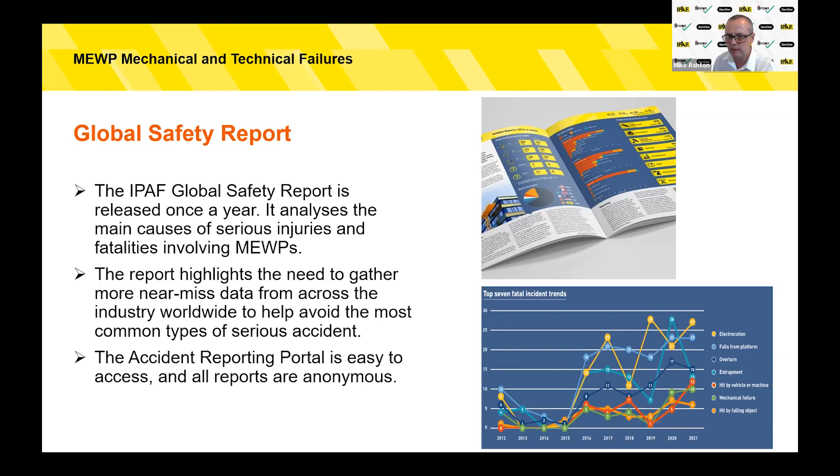In the 10-year reporting period, from January 1st, 2012 until December 31st, 2021, there have been 332 reports from 17 countries involving mechanical and technical failures on Mewps. There were 346 people involved and 39 fatalities. Construction accounted for 50.8% of reports, followed by rental activity and arboriculture.

The UK reported the most mechanical and technical failures overall, with nearly 75% of all reports originating from there. The US and the UAE were second and third place respectively. Accident reporting is mandated in the UK and the UAE. There have been 2 spikes in mechanical and technical failures in this period - the first one was in 2015 to 2016, and the second one was in 2019 to 2021.

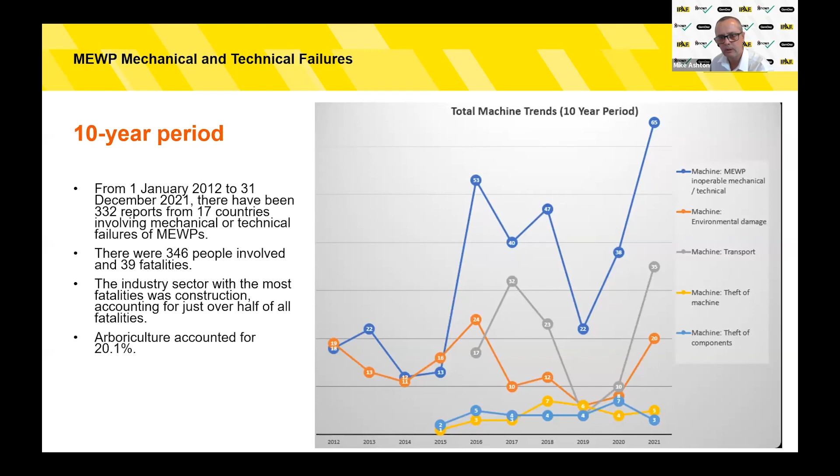This slide provides us with information on the period 2019 to 2021, so this is the 3-year reporting period. The number of fatalities in this period has risen significantly.

There were 23 fatalities, which is up 91.4%. Construction has nearly 60% of the reports, followed by rental activity and arboriculture. Nearly 60% of incidents occurred in the UK, followed by the US and the UAE.

The most common type of Mewp for incidents to occur on in this reporting period was 3B, mobile boom, with nearly 30%, followed by 3A, mobile vertical, with 26.2%, and then 1B, static boom vehicle type.

So 57% of incidents occurred in construction, nearly 20% occurred in rental activity, nearly 9% occurred in arboriculture, and 7.4% occurred in facilities management.

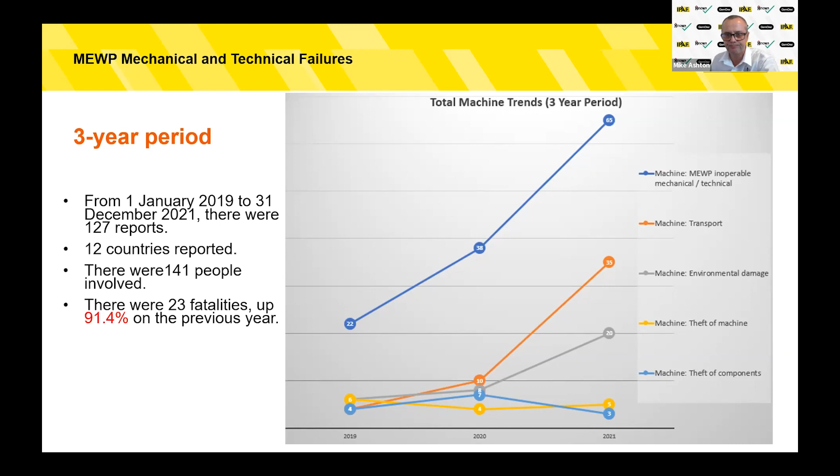This slide provides information on a 1-year reporting period, so this is 2021. The standout information here is that fatalities were down just over 30% on the previous year.

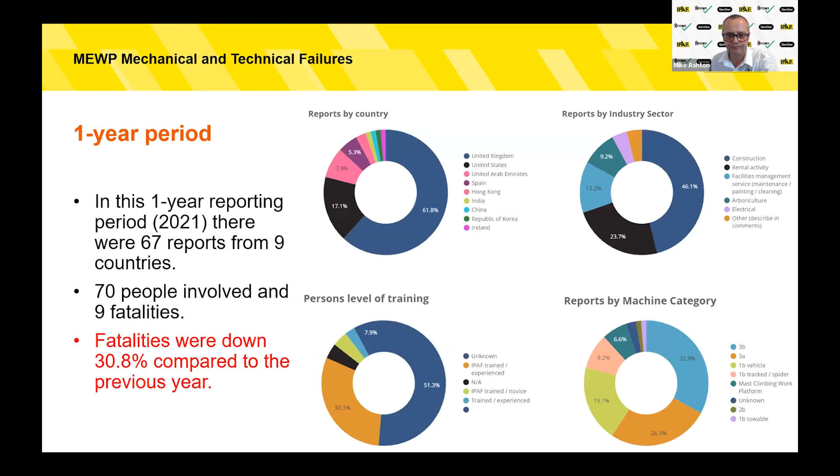This is our most up-to-date slide showing information from the 1st of January to November the 30th, 2022. So far, we've received 52 reports from 11 countries, 77 people involved, and 2 fatalities. So fatalities are down 77.8% compared to last year.

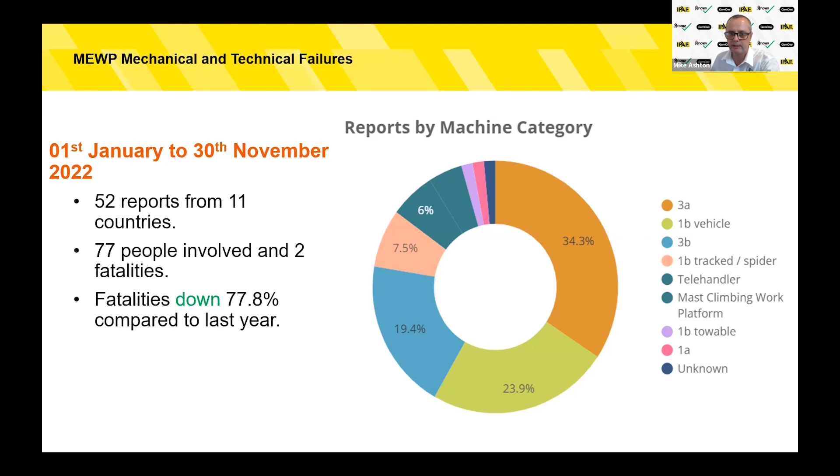Okay, so possible causes of mechanical and technical failures on Mewps. We need to prevent or minimize the likelihood of these failures occurring. So how can we do this? Next up, we'll be focusing on why and how failures occur, and we'll be covering the following items.

Number 1, failure to perform pre-use checks by Mewp operators. Number 2, failure to follow manufacturers' inspection and maintenance programs by owners of equipment. Number 3, complacency or behavioral-based violations. Number 4, impact or collision with other plant or objects. Number 5, unforeseeable failures. And finally, number 6, operating a MEWP outside of its capability.

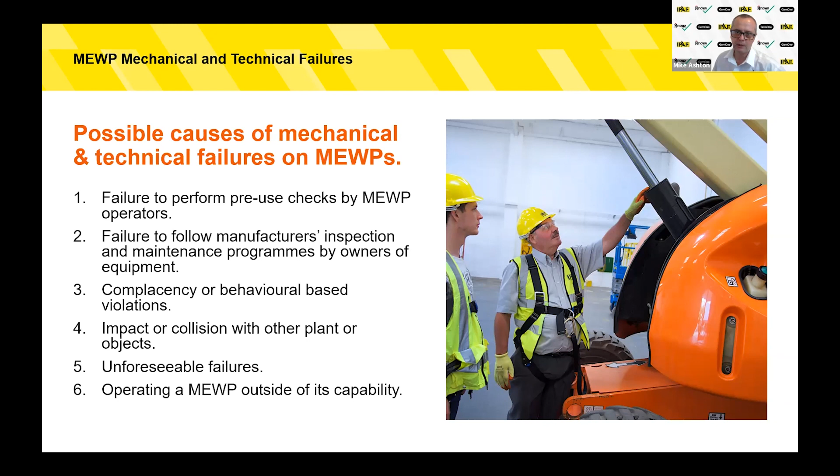First up is number 1, failure to perform pre-use checks by a Mewp operator. Pre-use checks must be carried out prior to use. The purpose of a pre-use inspection is to identify faults with operating systems, damage to equipment, and anything that could foreseeably go wrong. Pre-use checks must be recorded in the operator's logbook.

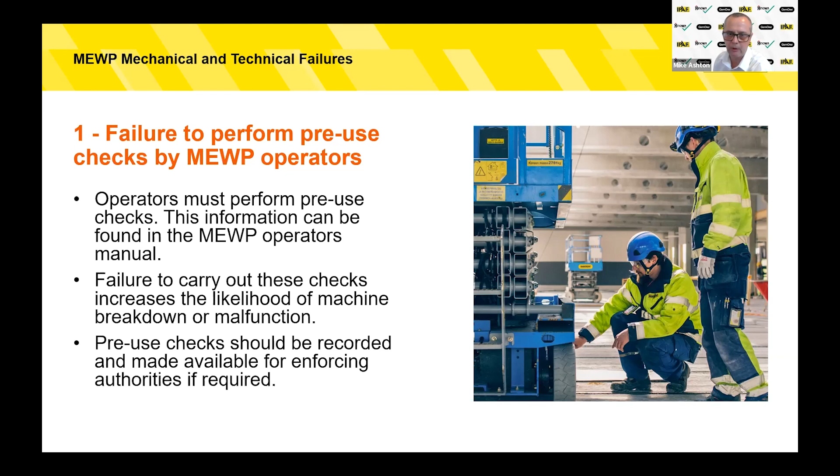If there are any faults identified on a pre-use inspection, the Mewp must not be used and the fault must be reported.

Number 2, failure to follow manufacturers' inspection and maintenance programs by owners of equipment. Mewp manufacturers specify the periodical inspection periods and maintenance programs. To ensure the safe use and reliability of your equipment, these instructions must be followed.

Examples of inspections could be 3-monthly, 6-monthly, or annual inspections by a competent person, as well as scheduled maintenance when a machine is at a certain age or has recorded a certain number of hours.

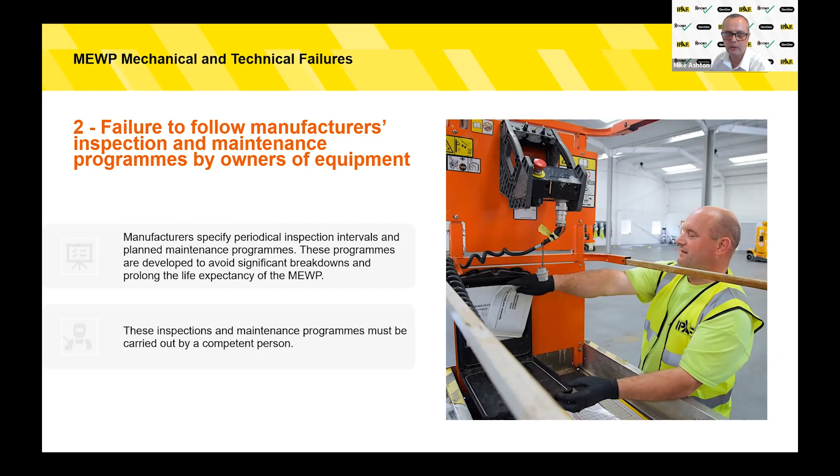Number 3, complacency or behavioral-based violations. Complacency is not laziness, it's an overconfidence that makes us unaware of potential dangers or threats, basically taking things for granted that nothing will go wrong.

This is not the attitude to have when it comes to the safe operation of MEWPs. Malfunctions do happen, damage can occur, and a damaged MEWP increases the likelihood of incidents occurring.

Violations are different to complacency. A violation is a deliberate deviation from rule or procedure. For example, if an operator failed on purpose to carry out their pre-use checks, that's a violation. We are seeing an increase in behavioral-based safety infractions from our reports received in the accident portal.

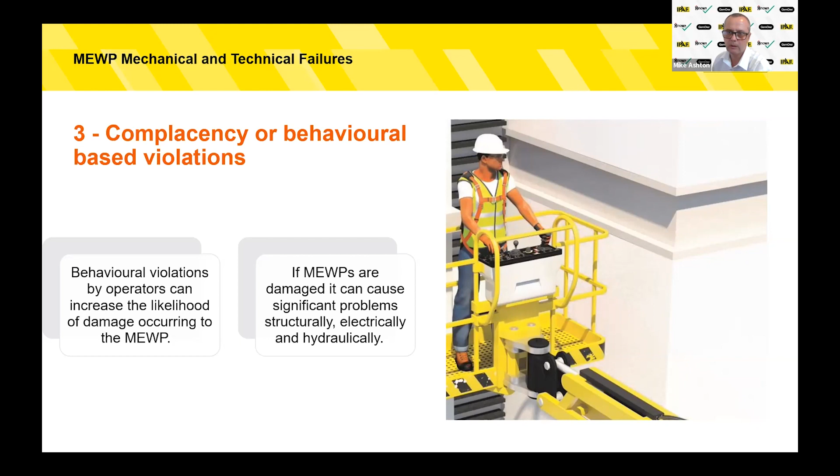Number 4, impact or collision with other plant or objects. If a MEWP has been impacted, it needs to be checked by a competent person for damage. Impacts can affect the safe operation of a MEWP, and can also affect hydraulics and electrical operating systems.

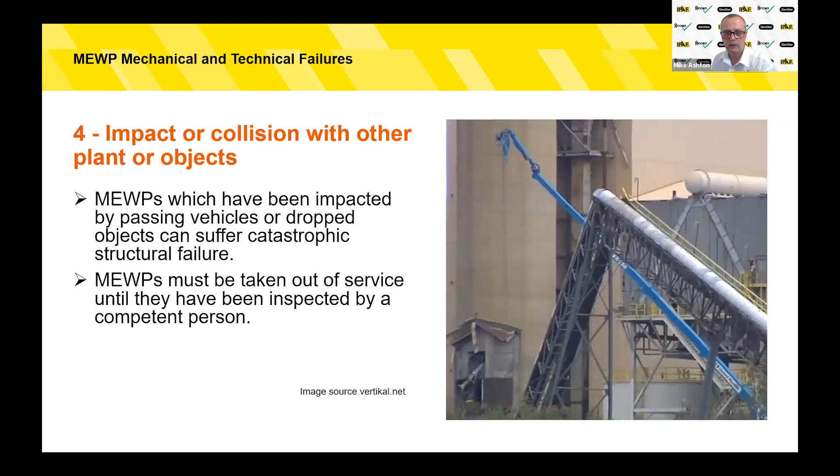Number 5, unforeseeable failures. Things can go wrong, we know this, but if we do all we can by carrying out inspections and checks, we can minimize the likelihood of mechanical and technical failures occurring. If things do go wrong, you should always isolate, tag, and report.

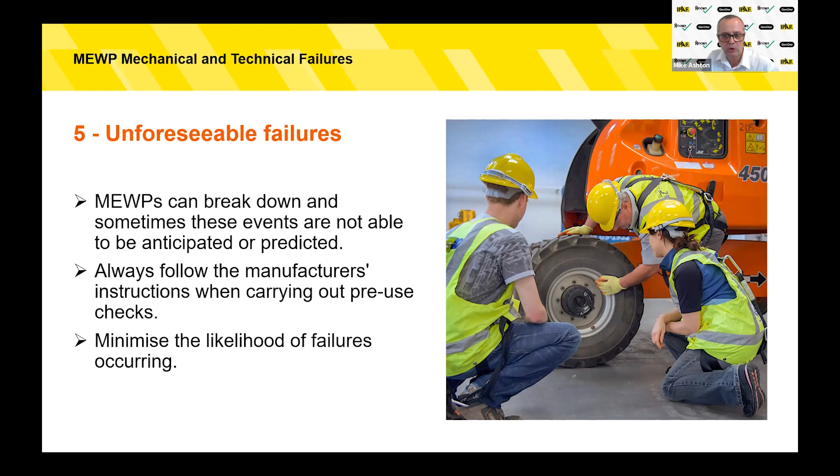Finally, number 6, operating a MEWP outside of its capability. All MEWPs are designed and tested to take the specified capacity limits while maintaining appropriate safety factors. If a MEWP occupant places more load onto the platform and tries to raise it, or puts more than the rated load on the platform while at height, there is a risk that this structure will be put under forces it was not designed or tested for.

Structural failure in this condition can be sudden and unpredictable and could result in collapse or overturn. Most MEWPs in the marketplace today have safety systems that monitor overload status and protect the operator from exceeding specified capacity limits. However, MEWPs built to previous standards may not have these systems installed. Operators must not exceed the stated safe working load and must always stay inside the MEWP operational envelope.

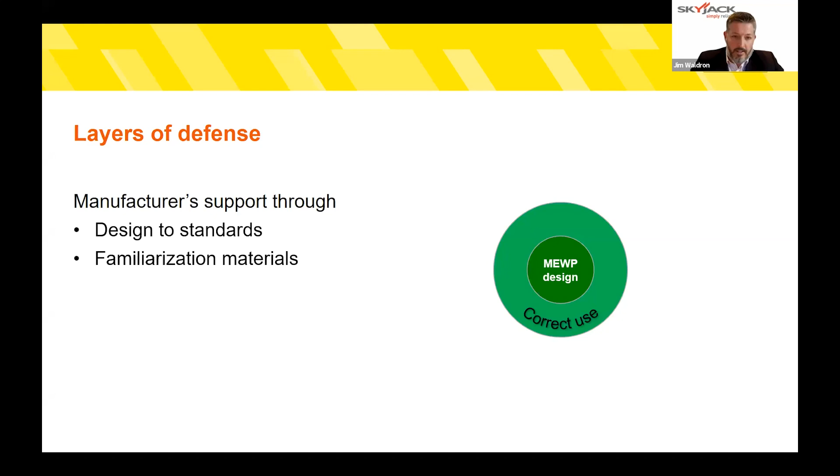Then there's the pre-use inspections that go alongside safe use, typically provided in the operating manuals and a checklist, ensuring that before you use a machine on any shift, you've gone through and are convinced that you yourself are comfortable getting on that machine, or you would let a family member get onto that machine and take it to full height and operate it in accordance with correct use.

So the pre-use inspections are supported by clear and easy to follow operating manuals. Then there's the preventative maintenance on a periodic cycle, where service manuals or the service information provided by manufacturers helps you avoid some of the technical and mechanical issues that can arise as a result of not following the preventative maintenance.

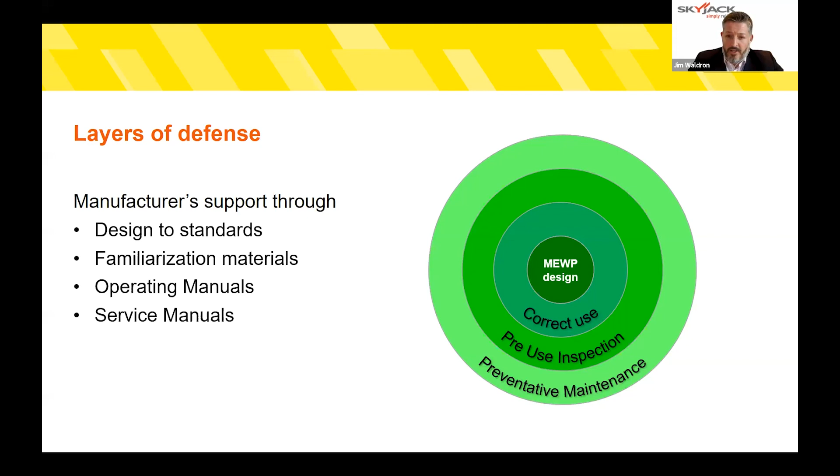An engine seizing, for example, is a good example of when oils haven't been correctly maintained or lubricants haven't been correctly applied. Then you have the thorough inspection, maintenance and repair, so if you do find issues or items picked up during the pre-use inspection and periodic inspections that need maintaining, you need to follow the service manuals again. As manufacturers, there's quite often service training and support from service teams to help with that. So if there are things that need to be replaced or repaired, the manufacturer will have a service team that supports and works through that process.

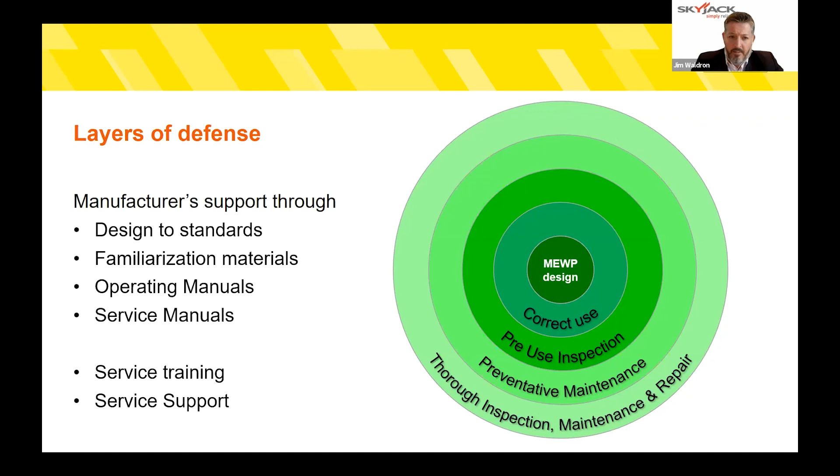So from a manufacturer's perspective, we support all layers of defense, and where required, we lean in and provide the information. But above that, what else do we do?

As I mentioned before, we design to standards, so there's a common understanding of the standards that every machine on the market meets. These standards didn't get created out of nothing. They got created by a group of experts that spend a lot of time working through these standards to ensure they cover the appropriate essential health and safety risks and hazards that exist as a result of working from a MEWP.

And they get continually evolved, but it's not just manufacturers in these design committees. They are users, operators, rental companies, experts, authorities, and they all work together to try and create the best standards possible for the region and for the expected use of the region.

You'll have seen perhaps over the last few years a general alignment towards different standards, where a safe practice from one standard gets adopted in another because it's more helpful to be common across the globe. So there is a natural migration of design standards across the globe to come together into something a bit closer. But there will always be local idiosyncrasies or local interpretations of hazards that are subtly different, and that drives subtle differences in local regional design standards.

We then provide the information that I mentioned. So that is safe use, that is operating, that is safe maintenance and safe servicing.

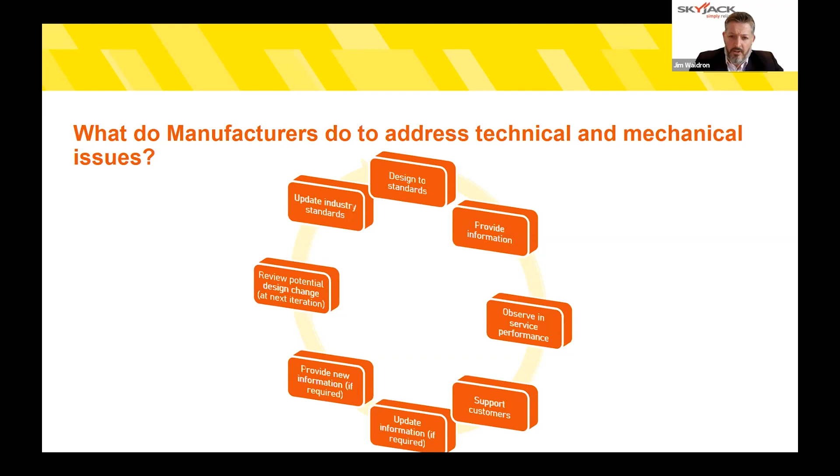So that's all saying what we've provided into supporting and reducing technical and mechanical issues. But what are the best forms of protection? We feel that there are two main aspects to that.

The first one is through general use. The most important aspect is familiarization on the machine that you're operating on. Through training, you can't get access to every machine. You get access to a type of machine and you would understand how to operate the type. But familiarization is critical for knowing how the safety systems operate, how the machine operates, what the operating limitations are for that particular machine. So with the familiarization, you get to know your product a bit more.

So you get to know what checks you're intending to do. So your daily checks become more aware and more thorough. And you start to be able to pick up things in advance of them being picked up in service, whether that's leading indicators to mechanical failure or technical issues as a result of something that's happened through your shift.

And the big one that I think Mike mentioned as well, if you're not happy, you flag it as a user. It's really important that if you are ever uncomfortable with the machine, standard or quality, then it needs to be flagged, tagged, locked and isolated and reported so that it can be put right. And I think the mantra of saying, am I happy taking my family up into the MEWP that I'm on, should be the mantra when you do daily checks.

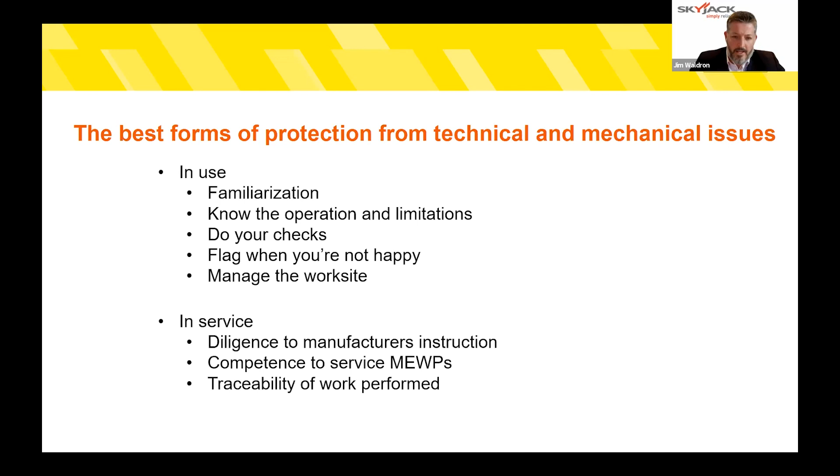And then the final one from the service perspective is traceability of work performed. So if you do work, you've got an audit history of it, so you're comfortable with the activities that have been performed on that machine, not just on the last inspection, but the inspection before and the inspection before that. So you can have good traceability of the thoroughness of the servicing on that machine.

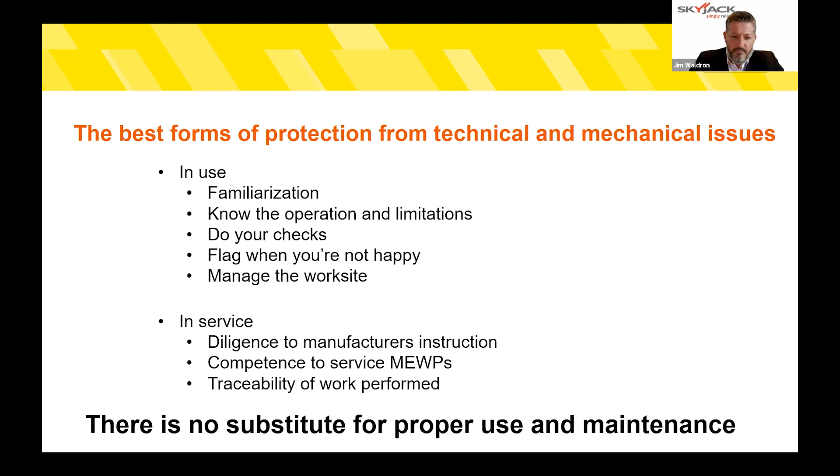And the summary I think I would come up with is there is no substitute for proper use and maintenance. If it's used properly, if it's maintained properly, then you will see a reduction in mechanical and technical issues in the IPAF portal. And I think that's the main message I'd like to get across, and I think Mike was emphasising that as well with his key points, which I fully support. So remain vigilant, remain diligent will be the key message for me.

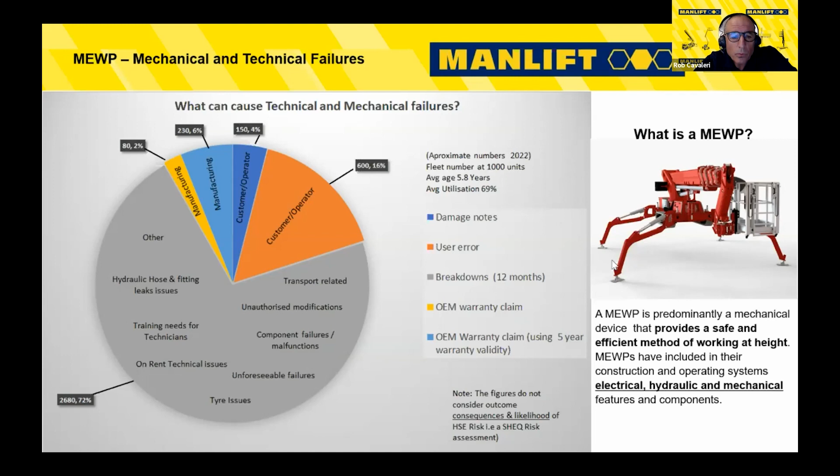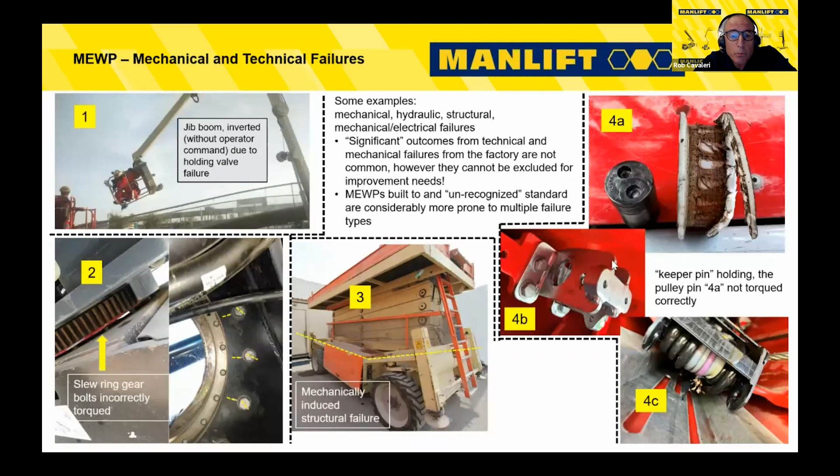It's important to remember that significant outcomes from technical and mechanical failures from the factory are not common. However, we cannot exclude these for improvement needs. Another comment to make is that MEWPs built to an unrecognised standard are considerably more prone to multiple failure types.

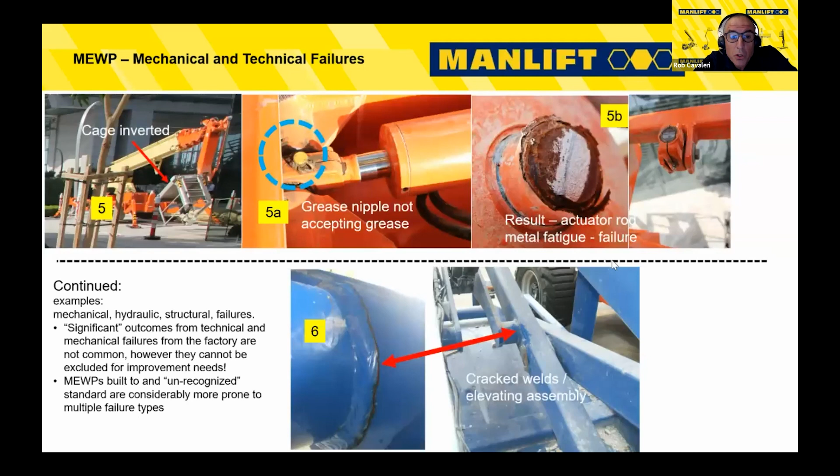Now I'm going to focus on competence in two particular areas. This is about MEWP operator competence. To be a MEWP operator, you must have the required levels of skill, knowledge, training and experience. This is one of the primary ways we can reduce and eliminate technical failures. MEWP operators without the required competency levels will cause technical failures via damage, neglect, incorrect use, abuse, and also by not doing pre-use inspections.

MEWPs are the safest way of working at height. But as a MEWP operator, I not only operate the MEWP, I'm also responsible for inspecting it, checking for damage and malfunctions before use, for example. So when we think about competence in MEWP operators, we need to make sure we're using structured training by accredited training instructors and recognised training bodies - only qualified training instructors should provide competence to our MEWP operators.

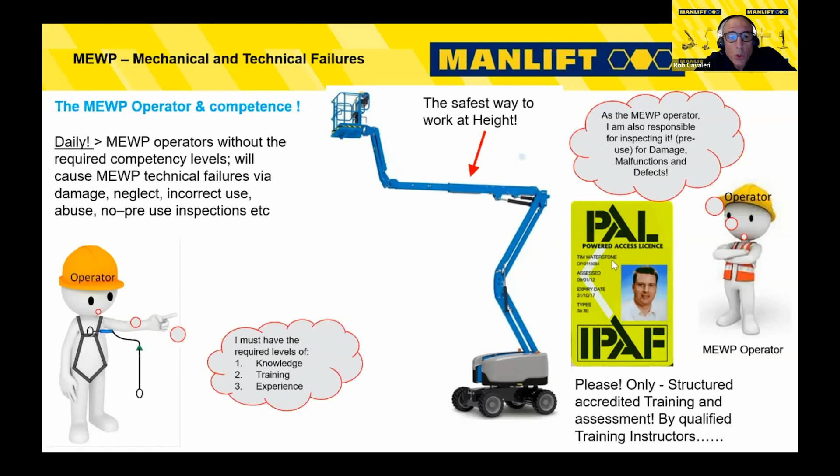I also want to talk about the competence of the technician, mechanic, or maintenance engineer. What's the task of the technician with the MEWP? They do post-hire inspections, periodic maintenance, repairs, major repair work. They need diagnosis skills, and they have to follow and understand the OEM instructions, because they're responsible for making sure the MEWP is safe, reliable, and looking good when it goes to the end user, to the customer. So to inspect, maintain, repair and operate this MEWP, you must have the required competency levels.

What is a competent person? A well-known description defines a competent person as a person appointed or designated by the employer to perform specific duties based on knowledge, training and experience.

Okay, looks like we may have lost Rob there. He seems to have frozen. Rob is actually over in India at the moment, so I think his connection in his hotel is probably proving to be quite challenging. We may get him back and hopefully he can finish off his presentation, but we've lost him completely now.

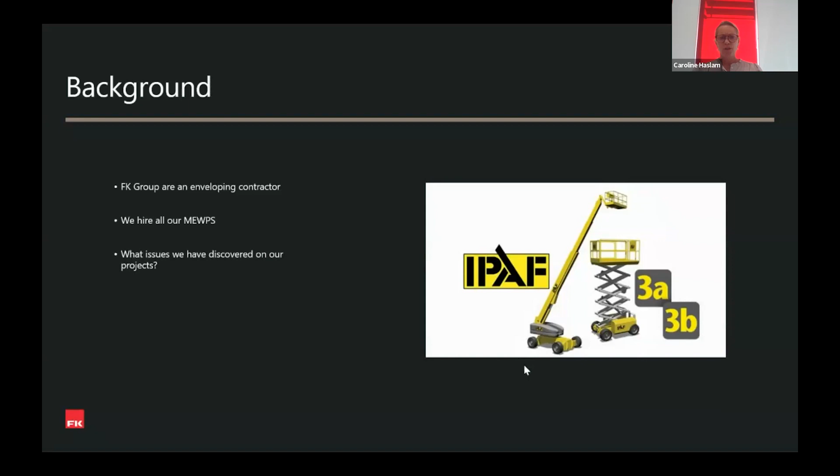The third issue we had, can I have my next slide please, was for the first time we had what we call in the UK a RIDDOR incident. We have a set of regulations which is around reporting of injuries, diseases and dangerous occurrences. I have to say in my career, this is the first one I've actually reported under the dangerous occurrence element regarding the failure of a machine.

So what happened was we had a scissor lift. It had been delivered to a site a couple of weeks before. When we looked into the history, it was probably around 7 years old. What occurred on the day was that the operator was extending the scissor lift up to do some roof works. He got to about 3 meters and heard a loud bang. He was able to bring the scissor back down, so we didn't have to put our emergency controls in place. On inspection, we found that one of the arms had failed, and therefore, as it's classed as a load-bearing part, it made it RIDDOR reportable.

Now, from a high-risk perspective, it also made us have to look at some other issues. First of all, we are still awaiting the report from the hirer to tell us the full failures of the machine. We think, from what we looked at, that it was down to metal fatigue on the arm. However, we are still awaiting further information. This occurrence happened back in July, so we've got quite a bit of a gap here.

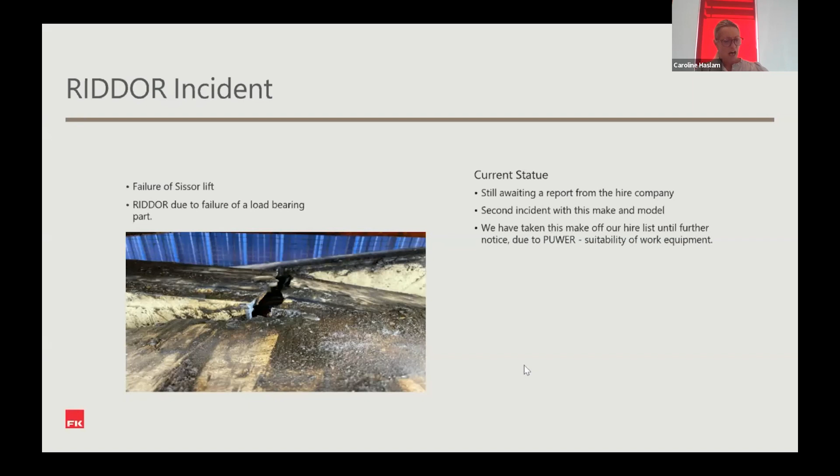Next slide please. So I thought I'd ask a few questions of my sites and projects, because I think sometimes as a health and safety professional, you have thoughts, but they're not always based on facts. So I put a few little questions out to them as part of this webinar today. One of the things is, do the checks become just a tick box exercise?

Interestingly, the response was, no, we all do them properly, which I find quite interesting when I go and look and find that MEWPs have been taken out of operation due to a failure or for some other reason. And again, when you look at the records that we keep, they don't tell us that it's been fixed.

And it's been put back into use. Are MEWPs being misused? Again, no. I'll be honest, this is one of our projects that the slides are from, so reality may be a different thought some days.

How often are breakdowns occurring? I know they're up from last year. This was a massive yes, there's been a huge increase. Again, I don't have precise figures, and that's something we will be looking at for next year.

Are periodic inspections being carried out by the rental companies? This was pretty good. Most said yes, that they were and could prove that the paperwork was in place.

Are operators trained? Well, we only have IPAF operators, and that is one of our company rules. So again, it was a bit of a question out to them.

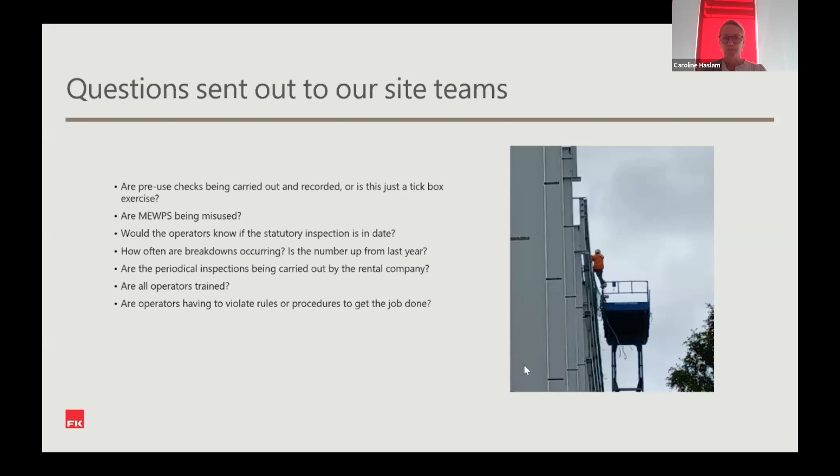Is reality the same as what the site teams think it is? Next slide, please. Currently, we don't calculate as a KPI how much this lost time is costing us as a business. But what I have found, if you give me the next slide please, one of my site managers is already doing this.

So I think it'll be a great thing for us to introduce next year to actually look at what breakdowns are actually occurring. Is there any trends, i.e. make, model, manufacturer for us?

As a hirer, how much that downtime is, because one of the issues touched on earlier is about the people that come out to fix the maintenance and actually come out and fix the faults. We've on some models struggled to get parts once there's a breakdown, so again that has increased the time, and actually getting maintenance engineers out has also proved to be a bit of a trend for ourselves as a hirer. So from next year, I'll be starting to look at this in more detail because it has become a bigger risk to us as a user.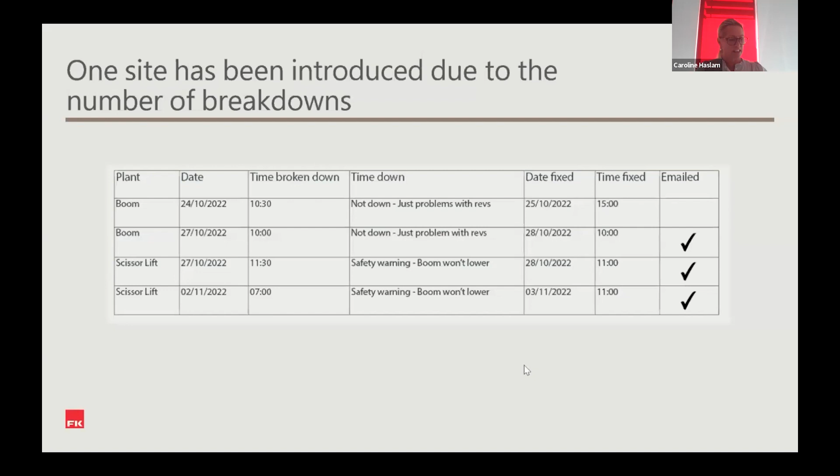Next slide, please. So there are some really good things that we find as a hirer. We have some great operators that are IPAF trained. I think, again, going with the IPAF training gives us confidence of the standard that our people are trained to. We have on the whole good statutory inspections, and we have really good support from our hire companies.

The other thing we're having to learn, and it's a great thing because it starts stretching us, is about the new models coming to the market and their capabilities as a hirer. That's been a good area for us, and I'm working with our plant hire manager on that because there's some great new kit coming out. But what I found is our site teams like to use the make and model they've always used because they know it. Areas that I think really are for improvement for us and maybe the industry is that we need to record our breakdowns better.

We need to make sure that they're entered onto our plant registers. And we also need to ensure that we have the traceability of when things have been fixed. We need a better understanding of the maintenance of the MEWPs that we hire in. It's not particularly an area we've looked at in the past. We've tended to rely on our hire companies, but I do believe as a hirer now, it's an area that we need to look more into.

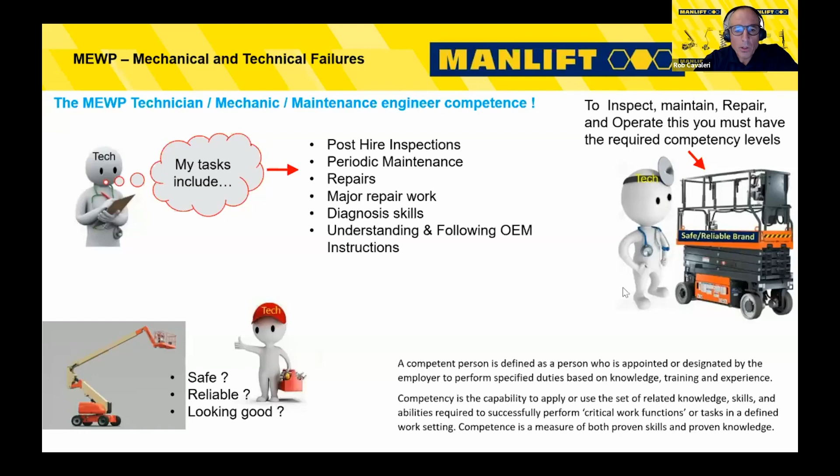So I've discussed some of the aspects of what we require from operators' competence and also from the maintenance technicians' competency levels required. What do we need from a manufacturer, from a rental company perspective?

We need more in-country technical training availability - it's been a challenge for some time now, and we don't want to pay for technical training, funnily enough. We want the manufacturers to always consider maintenance technicians and ease of maintenance in MEWP design. By the way, I'm not saying none of these things are happening, we're just saying we want more and more of this.

And we want MEWPs that meet a recognized standard, and we want manufacturers to always have accreditation - ISO accreditation in quality, in safety, in sustainability, for example. And we want online technical training availability, on-time parts supply.

We want improvement in hydraulic hose layout in the MEWP - one of the biggest issues we have with technical failures is hydraulic hose or hydraulic related leaks. And we want speedy response to solutions, technical solutions from the OEMs, and this might mean partnering up with third-party suppliers where they're reputable.

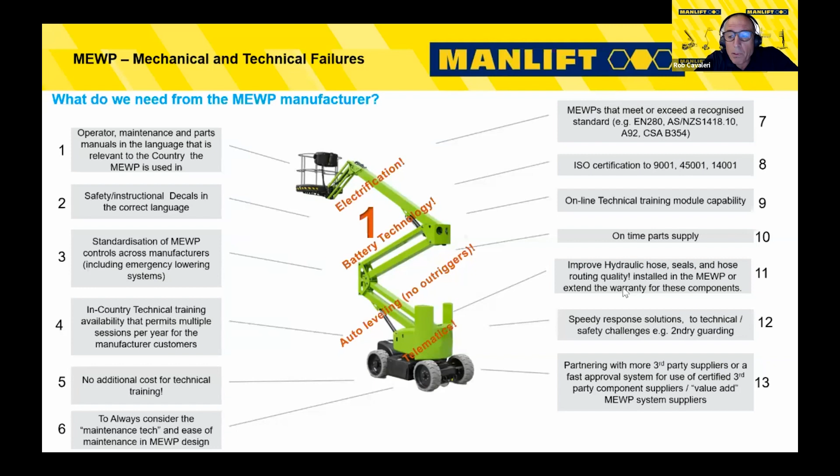So here's what we do as a rental organisation. We have a fleet renewal program. We have product knowledge training for our commercial teams and our customers to improve product knowledge, to make sure we're giving the right machine for the job. We follow IPAF systems and process best practices for all things related to mobile elevating work platforms.

We have open house days and safety days for our customers for knowledge learning. We have continuous internal and external audits and improvement reviews. We're measuring ourselves continually.